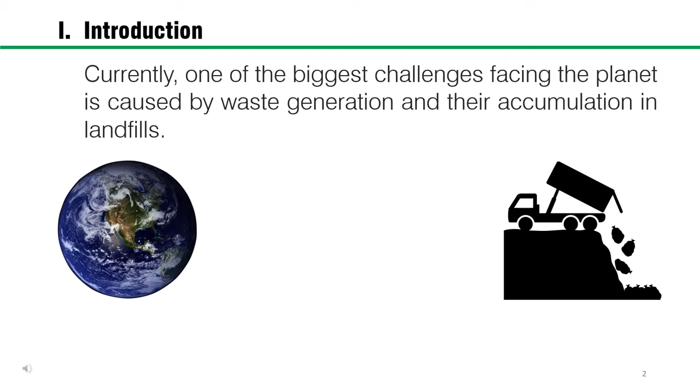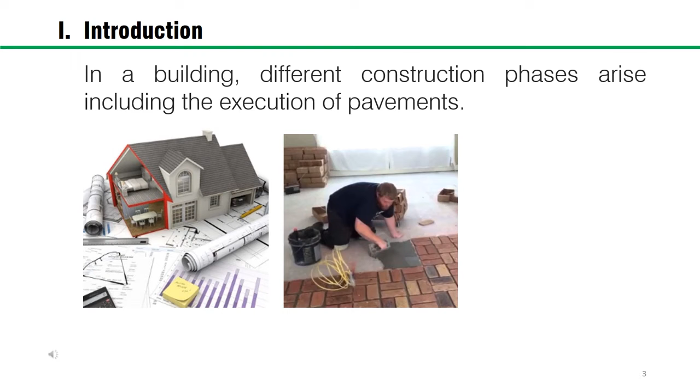Currently, one of the biggest challenges facing the planet is waste generation and its accumulation in landfills, construction and demolition waste being the most representative. In a building, different construction phases arise, including the execution of pavements, which are considered the elements with the larger horizontal surface.

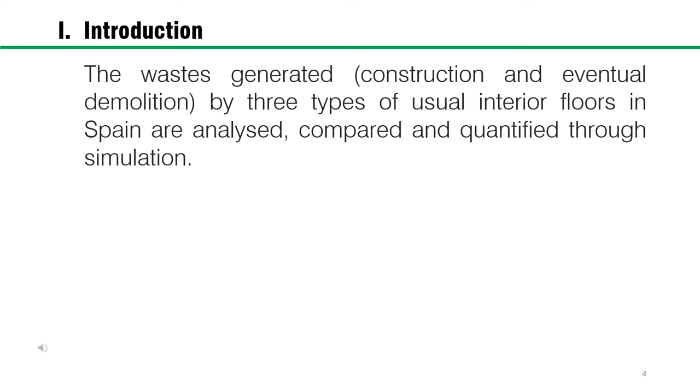On this research, the waste generated by three types of usual interior floors in Spain are analyzed, compared, and quantified through simulation. The constructive application was equivalent and with comparable feasibility of use.

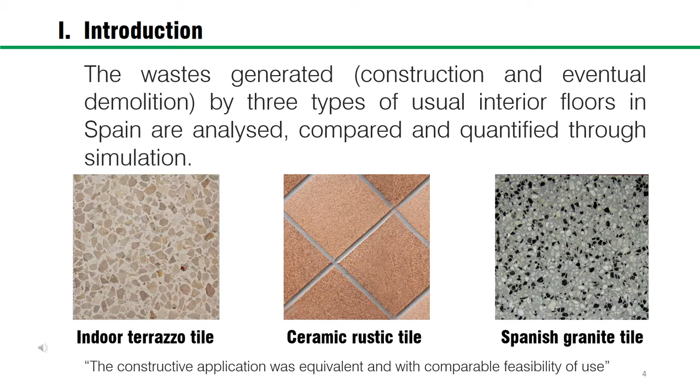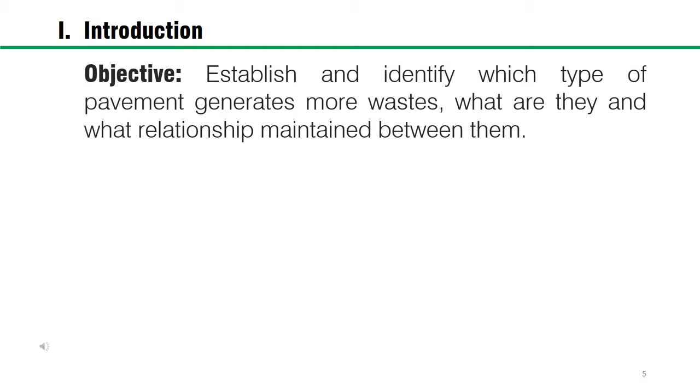The aim of this research is to establish and identify which type of pavement generates more waste, what they are, and what relationship is maintained between them.

For that purpose, we use the Net Waste Tools software as a simulation tool. This allowed us to obtain reports for each pavement type. Finally, these reports were standardized to make a comparison.

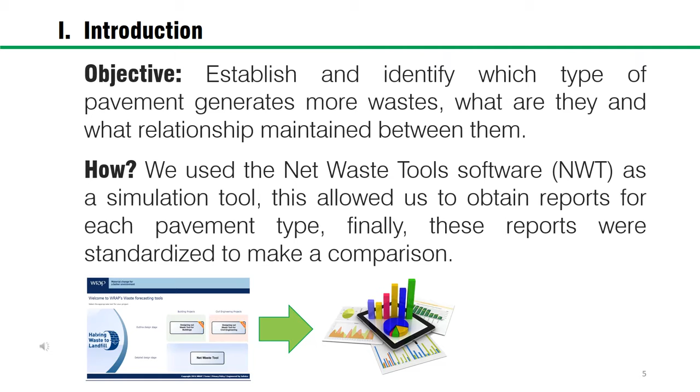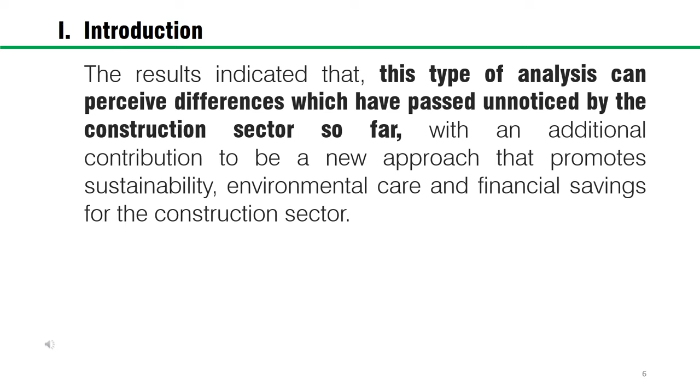The results indicated that this type of analysis can perceive differences which have passed unnoticed by the construction sector so far, with an additional contribution of being a new approach that promotes sustainability, environmental care, and financial savings for the construction sector.

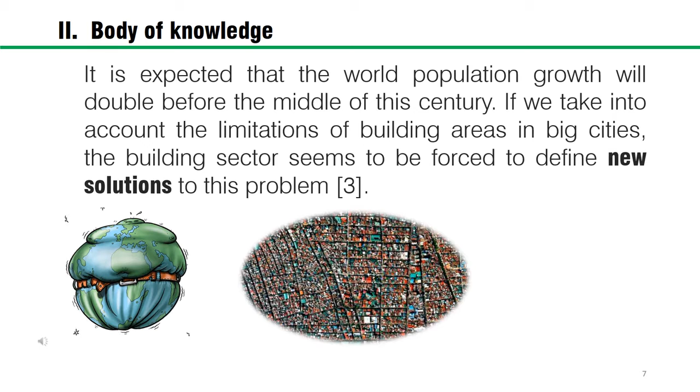It is expected that the world population growth will double before the middle of this century. If we take into account the limitations of building areas in big cities, the building sector seems to be forced to define new solutions to this problem. We think that the validation of building systems for sustainable housing could help in this regard.

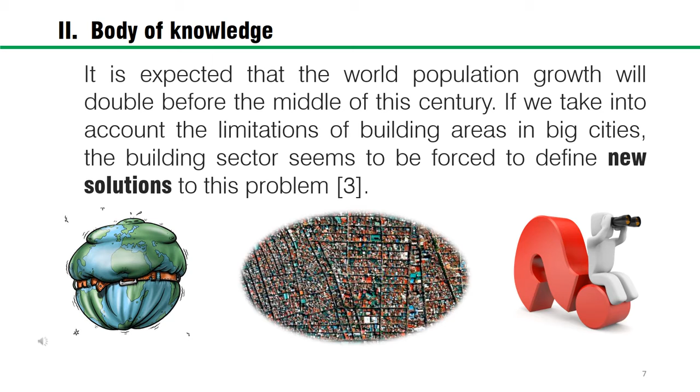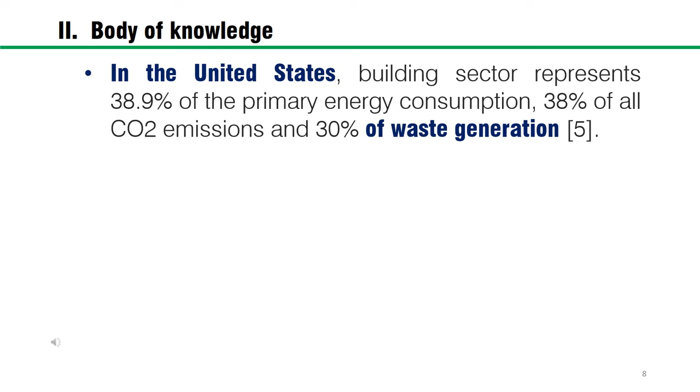In the United States, the building sector represents 38.9% of primary energy consumption, 38% of all CO2 emissions, and 30% of waste generation. In the European Union, building construction consumes 40% of primary energy, 40% of all materials, and generates 40% of wastes. In Spain, the construction sector produces around 40 million tons of residues, reaching 32% of the total volume.

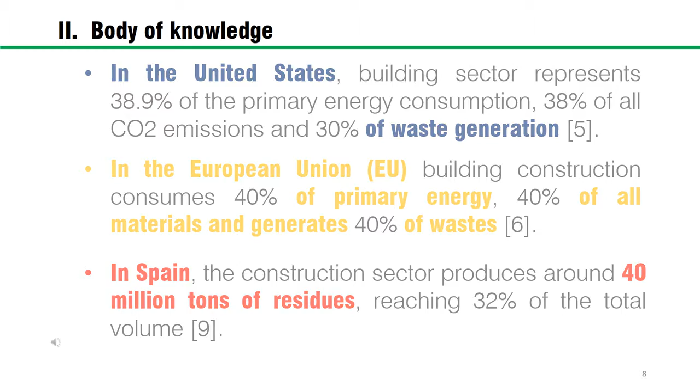Between the different elements in a building construction, indoor pavements have not been linked to optimization criteria for sustainable ratification, despite the existing variety of systems and similar constructed solutions.

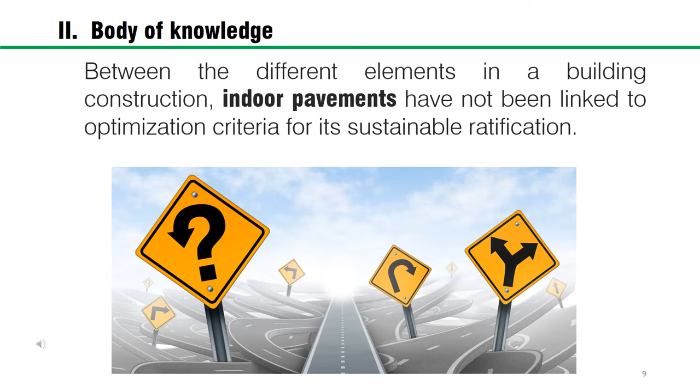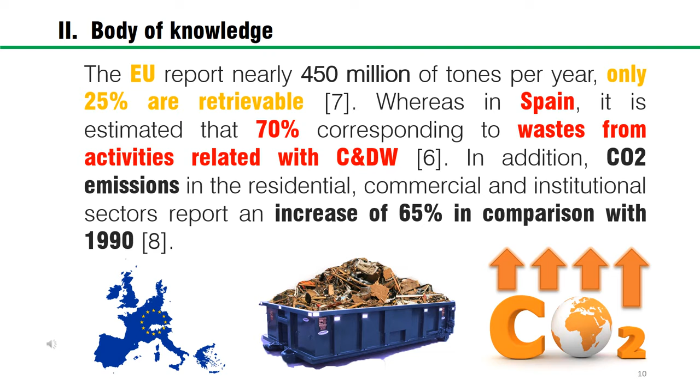The European Union reports nearly 450 million tons per year. Only 25% are retrievable, whereas in Spain it is estimated that 70% corresponds to waste from activities related to construction and demolition. In addition, CO2 emissions in the residential, commercial, and institutional sectors report an increase of 65% in comparison with 1990.

Sustainability in construction could bring new solutions to current society's paradigms. One of these could be the establishment of new environmental criteria on the constructive system.

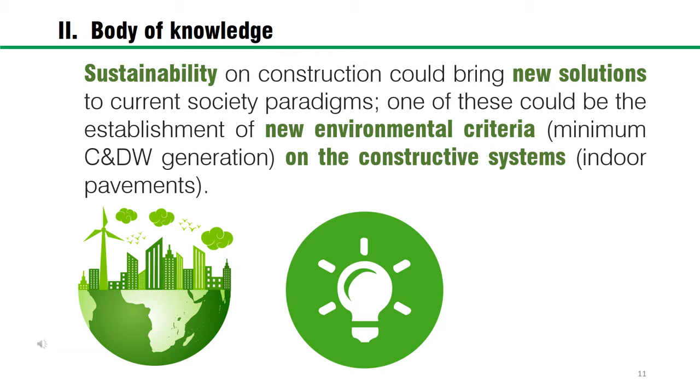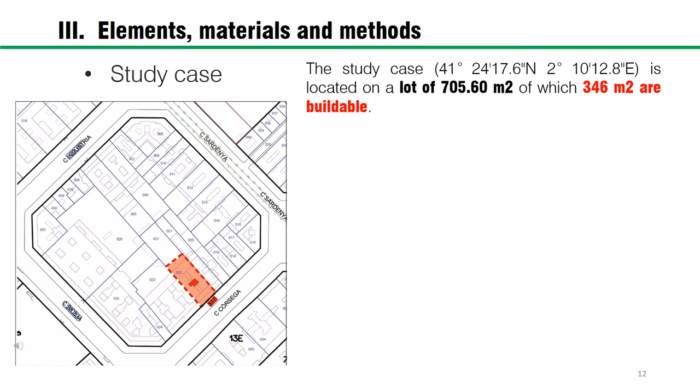The study case is located on a lot of 705.60 square meters, of which 346 are buildable. The building counts with 34 houses and one commercial unit on the ground floor. It consists of a basement, a ground floor, 8 similar upper floors, and an attic.

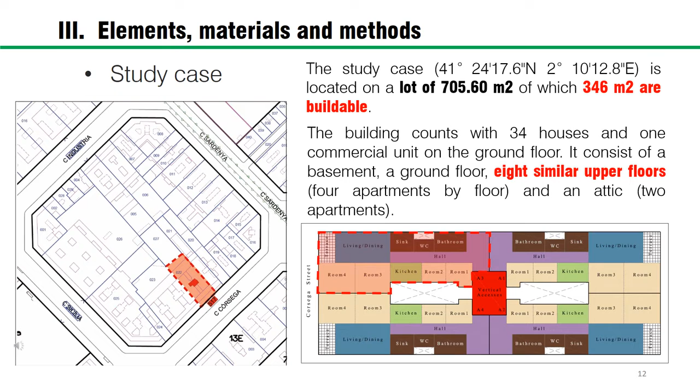The type apartment has the following distribution of spaces: living and dining room, kitchen, 4 bedrooms, bathroom, and separate WC and sink.

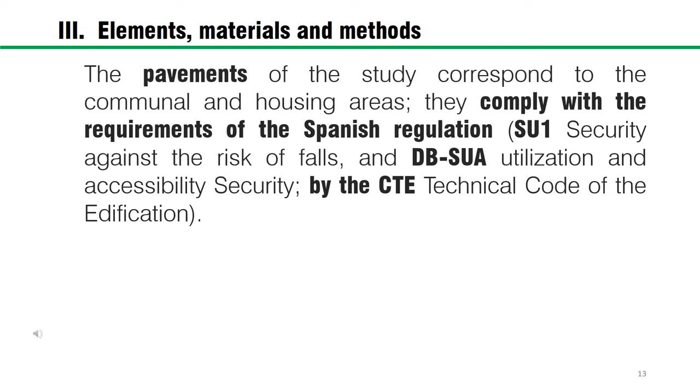The pavements of the study correspond to the communal and housing areas. They comply with the requirements of Spanish regulation regarding security against the risk of falls, and utilization and accessibility security, by the Technical Code of the Edification (CTE).

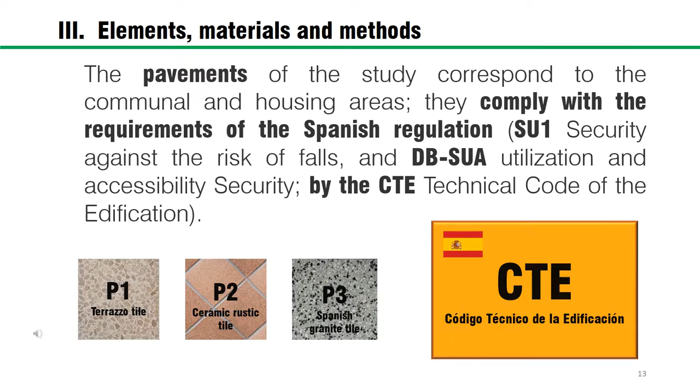According to the selected pavements, you can see in figure 2 the geometry, its configuration, its materials, and its surface thickness.

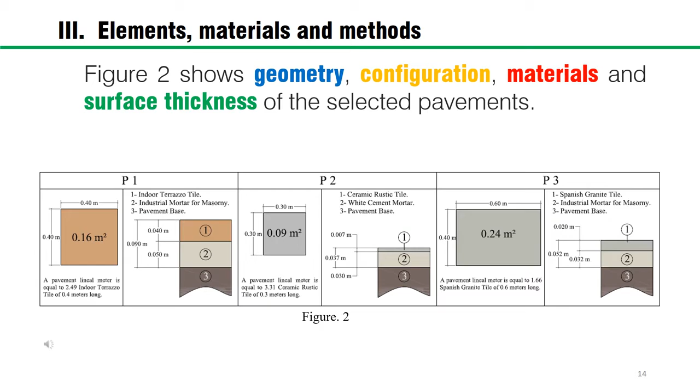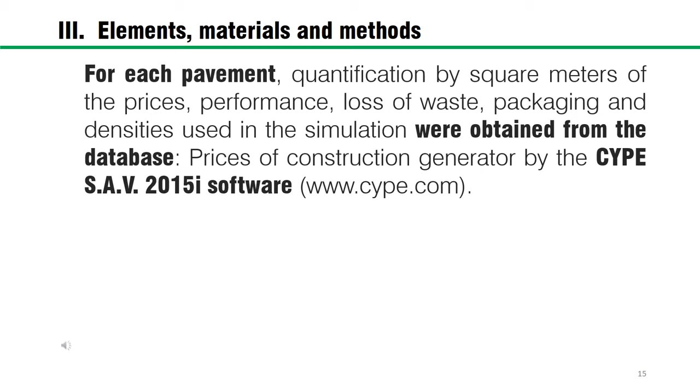For each pavement, quantification by square meters of the prices, performance, loss of waste, packaging, and densities used in the simulation were obtained from the database of construction prices generated by the CYPE software.

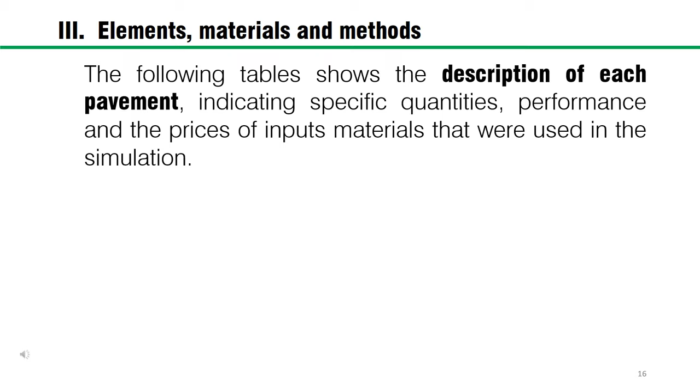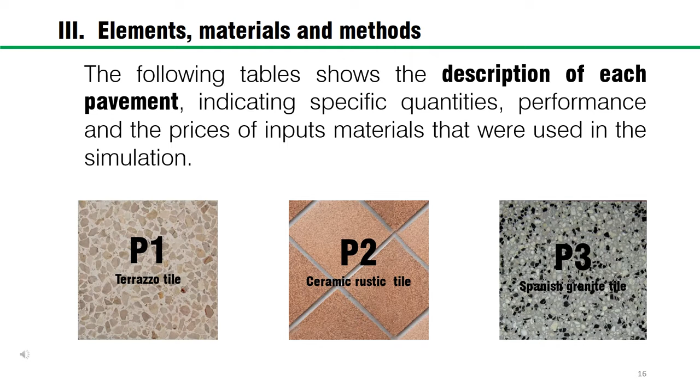The following tables show the description of each pavement, indicating specific quantities, performance, and the price of input materials used in the simulation, P1 being a terrazzo tile, P2 a ceramic rustic tile, and P3 a Spanish granite tile.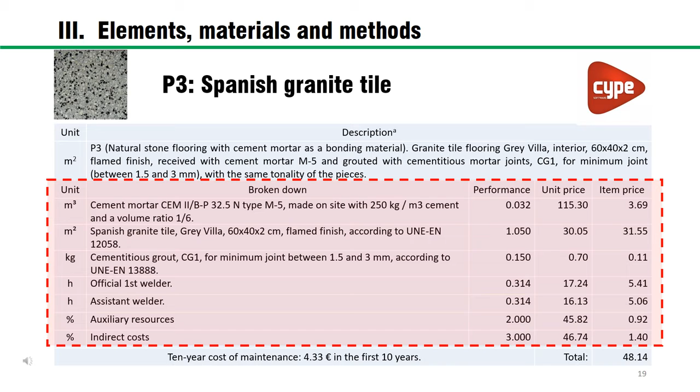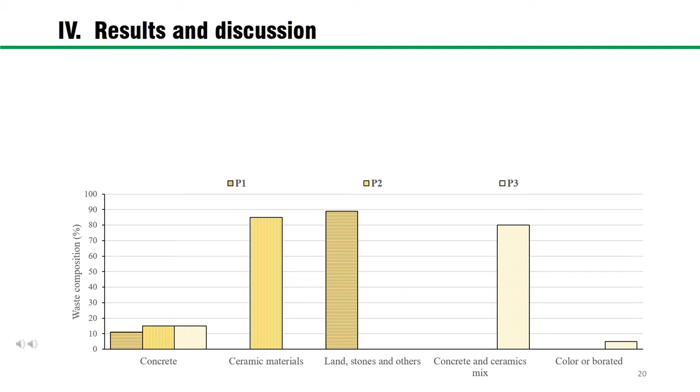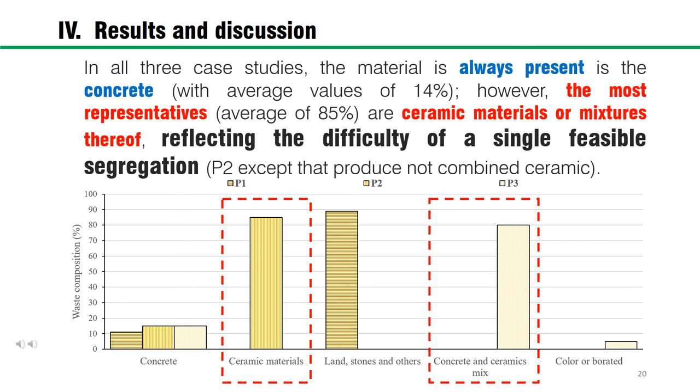This figure shows the results from the NetWaste tool, partially expressed in percentage of each pavement studied in tons, and grouped according to the European Waste Catalog (CER). In all three case studies, concrete is always present as a material. However, the most representative are ceramic materials or mixtures thereof, reflecting the difficulty of a single feasible segregation.

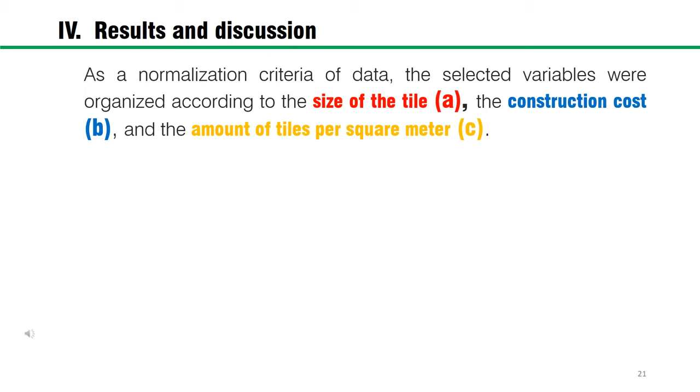As a normalization criteria of data, the selected variables were organized according to the size of the tile, the construction cost, and the amount of tiles per square meter.

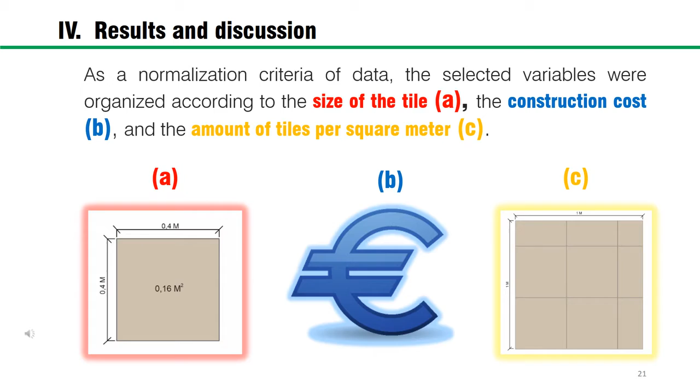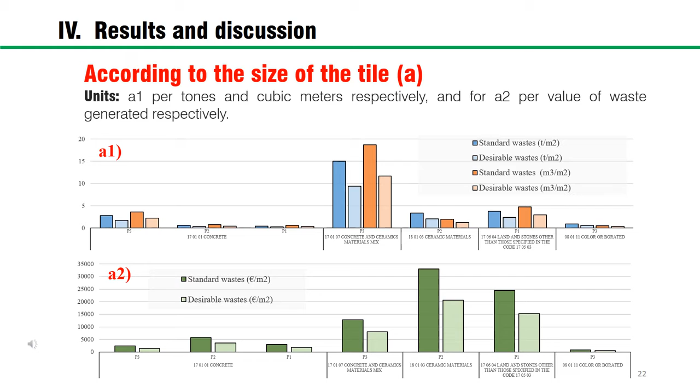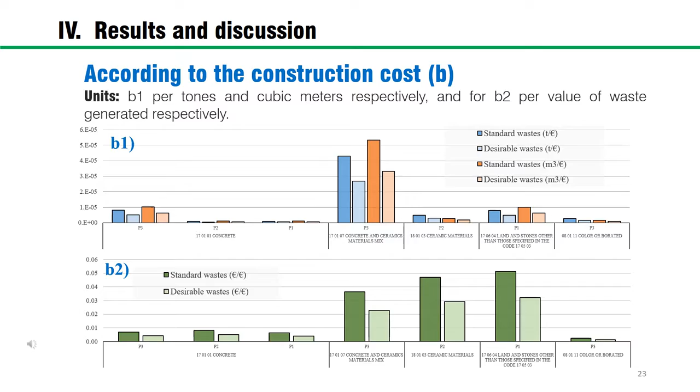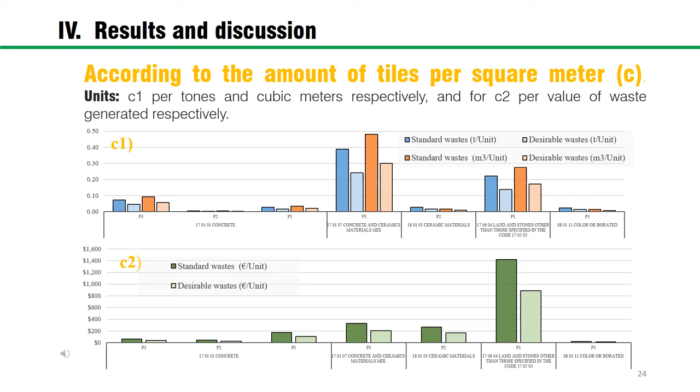In the case of A1, B1, and C1, the waste generated by P3 is the most in volume and weight. Also, in all three cases, standard management produced significantly more waste compared with desirable management. Finally, the unit of cubic meters proves to be the most representative form of measurement.

We can see on these three graphs that the standardization criteria that best allows us to discern the behavior is the size of the tiles. You can see that with the highest numerical scale on the vertical axis.

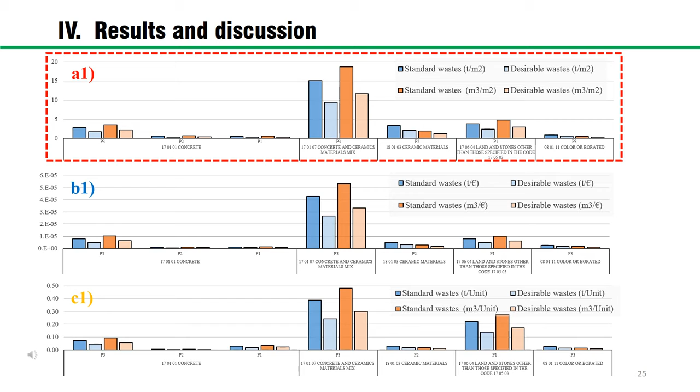In terms of A2, B2, and C2, the waste which presents the highest value varies according to the normalization criteria. For example, for A2 it is study case number 2. For B2 and C2 it is study case number 1.

We can consider the amount of tiles per square meter as the most sensitive criterion of normalization of the three. Moreover, in all cases, standard management always generates more waste than desirable management.

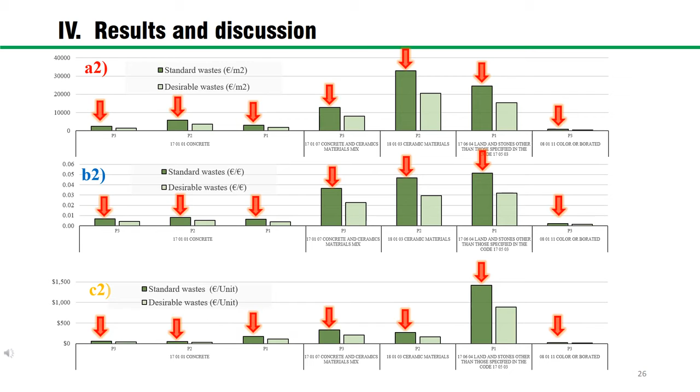This paper shows that the establishment of waste minimization techniques and adequate management bring financial benefits for the construction and environmental benefits for the site, because they avoid unnecessary materials use and generate less waste during the execution process. This is particularly evidenced by the difference in prices and volumes between desirable and standard management.

Option 3 was the most expensive in terms of management, followed by option 2 and finally option 1. The cost difference between P2 and P1 is not significant, but P3 exceeds the material and construction cost of P1 by more than double.

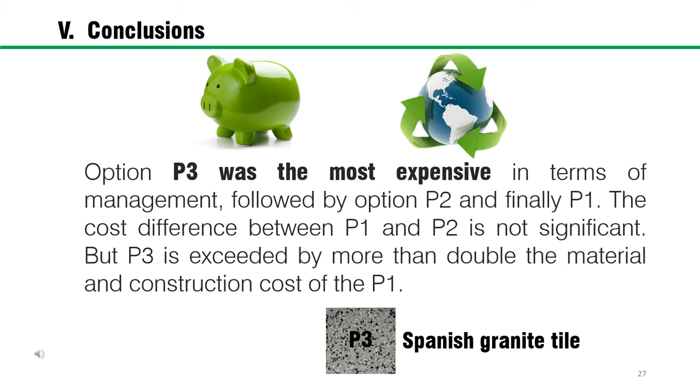In the case of obtaining waste reduction performance, the highest occurred with option P3. In spite of the increase, the value of recovered materials only reached 10%.

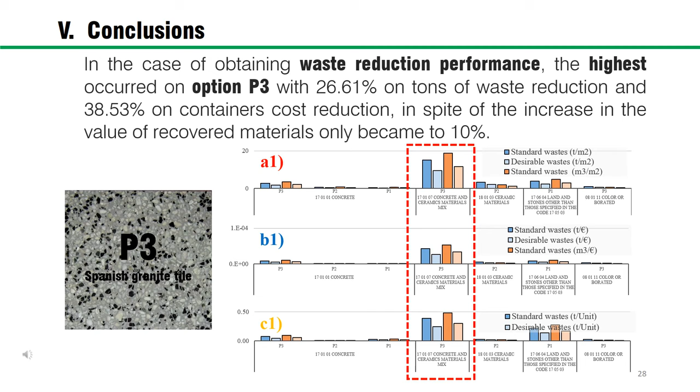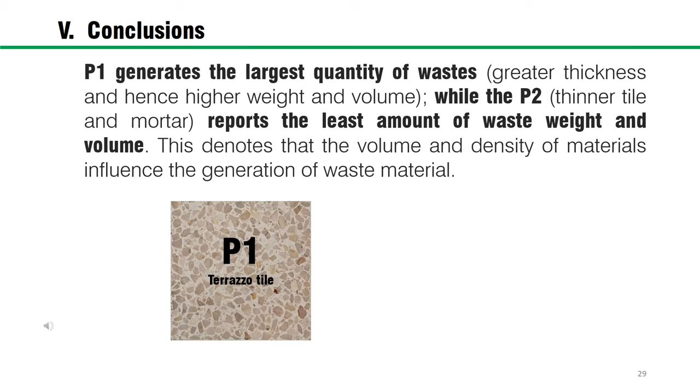Study case number 1 generates the largest quantity of waste, while number 2 reports the least amount of waste weight and volume. This denotes that the volume and density of materials influence the generation of waste material.

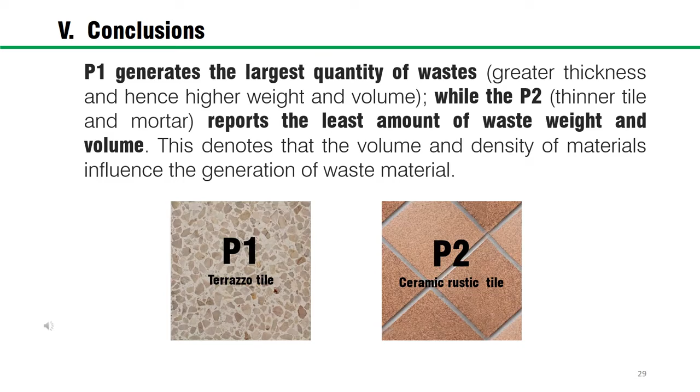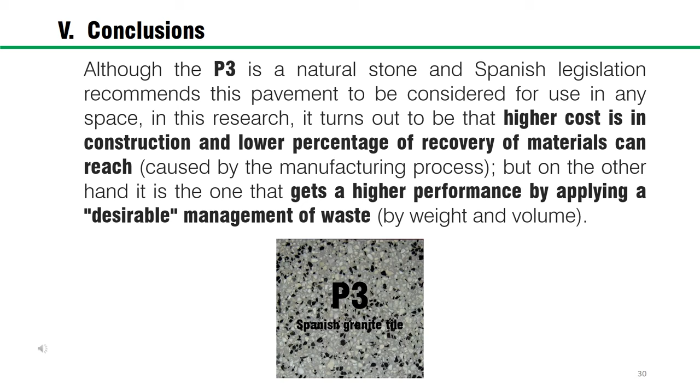Although the Spanish granite tile is a natural stone and Spanish legislation recommends this pavement for use in any space, this research shows that it has higher construction cost and lower percentage of recoverable materials. But on the other hand, it achieves higher performance when applying a desirable management of wastes.

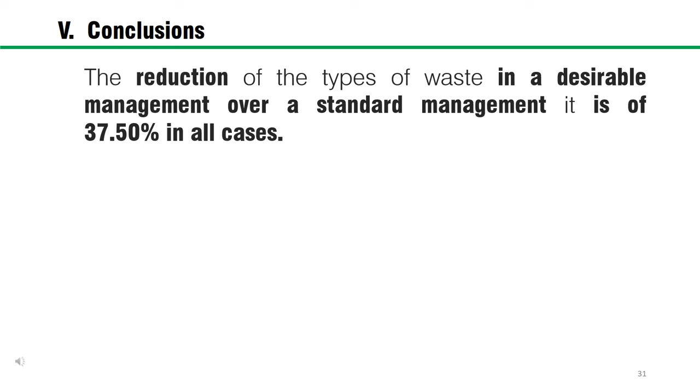Moreover, the reduction of the types of waste in a desirable management over a standard management is 37.50% in all cases. It can therefore be argued that the application of waste minimization techniques and the establishment of appropriate waste management will generate economic and environmental benefits, given that the tons of materials intended for landfill, the volume they occupy, and the cost will be less.

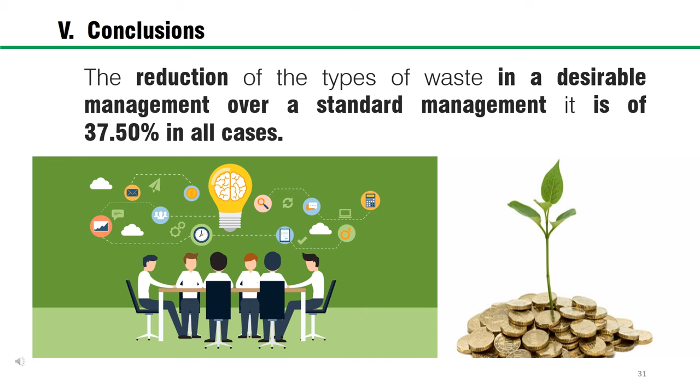Finally, weight and volume of the tiles were the best parameters to describe and establish correlation between different variables, being the prescribed decision parameter for the final election between sustainable indoor pavements.